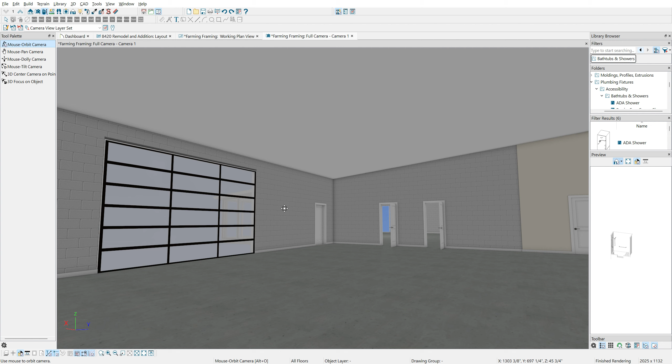If that's the intent, we are definitely missing some structural elements, and we'll get stuck with the city. Per plan, it's calling out what looks like an open space, but that's not the case because there is a block wall, and there's two doors that were leading before into your offices, and then that's your other door. This would require a major build.

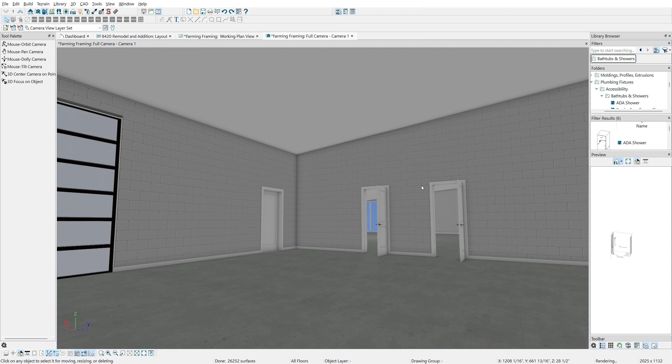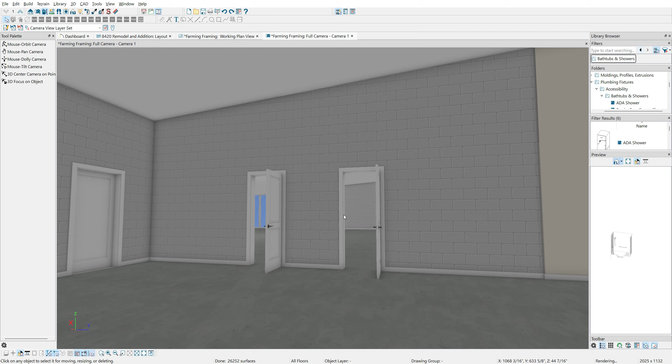It would not be a cheap thing. You would have to basically create a footing that would have to meet the structural design, and an engineer would actually have to stamp it. Then you'd have to put a post, be post and beam, more than likely an I-beam, metal, and then we could knock out this block. But I don't know how realistic that is. The time frame and the engineering process takes some time. We can definitely explore that and see if it's a viable option.

Now your second question is on the staircase. The layout is shown that you'd like the staircase changed with the orientation. It's currently going this way.

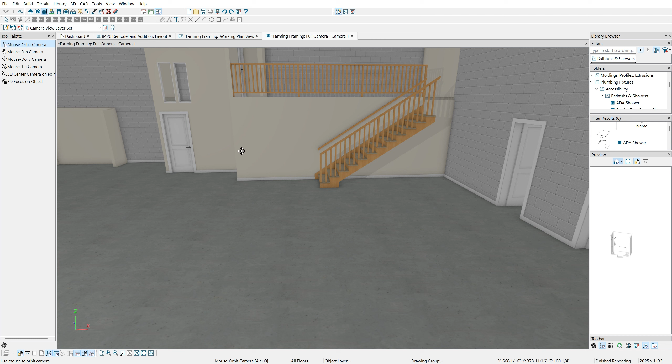Now your joists would have to be brought out. Your floor would need to be taken out, and then your joists would come out, and then you'd basically create your post and beam. Typically, on a remodel, you'd actually have a design, and then would build it accordingly. We can do that and try to run an inspection, and if we don't have the drawings for that, we can just build them and call an inspection.

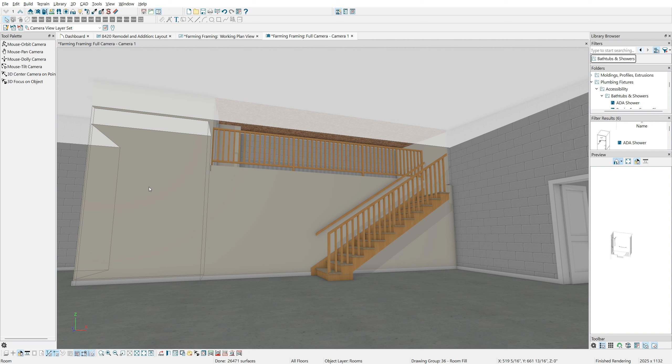Third, your wall as of right now, it's going up like that. Trying to remove this wall and reframe it would be something really major. In addition, you have your I-beams as supporting structure—you're not able to move those out. As discussed, there's an I-beam that's being removed, but trying to remove this whole structure with the welds on it, I would not recommend that. That's something that needs to be discussed.

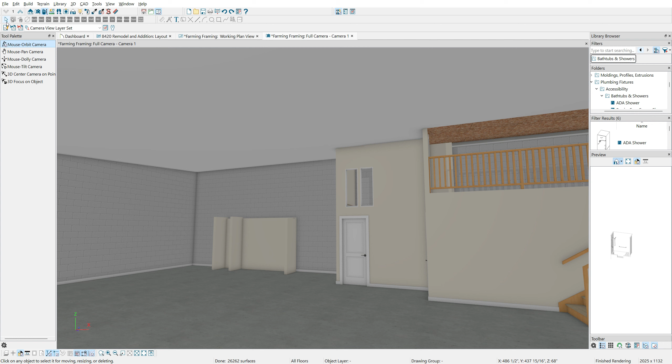Your fourth question is basically on this wash area. What are we doing here? How is that going to connect to your plumbing, your sewer line, your water, all that good stuff? Is this structure being built with 2x4s, or is this going to be more of a cabinet style, and then everything gets hooked up? Regardless what gets done here, what are we doing with this block wall—is this getting framed in, so all the conduits, sewer line, and all that can run behind it? It's doubtful you'd want that visible.

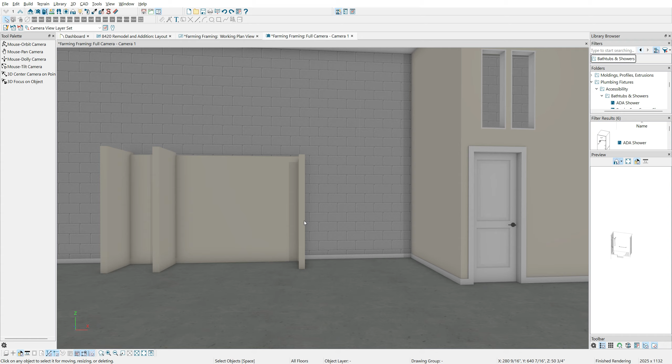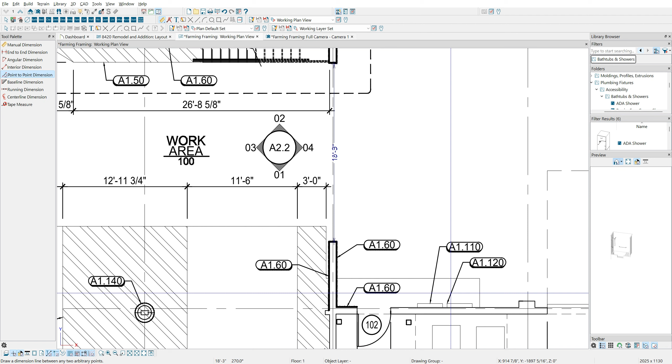I mean, you could potentially do a glulam. It'd probably be a 6x14, and you'd need some pretty serious stuff in there. And how do you connect that to the block? I don't know. It's doable, but it'd be something pretty major.

Now your staircase, changing the orientation—remember, you have your joists. You'd literally have to change the direction of the joists, make sure they come up to here. Then you've got your joists sticking out. Then you're doing basically a header rim board, and then you've got your beam in here, and then you've got your posts that are supporting that.

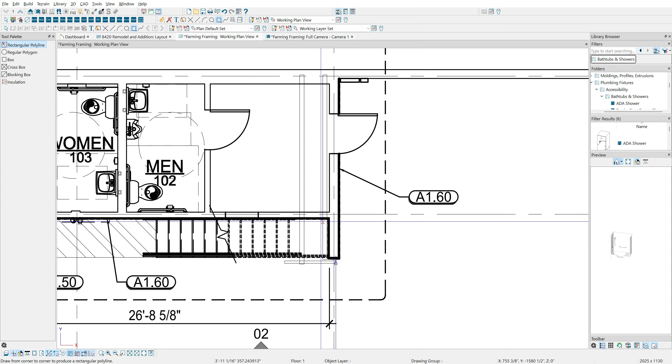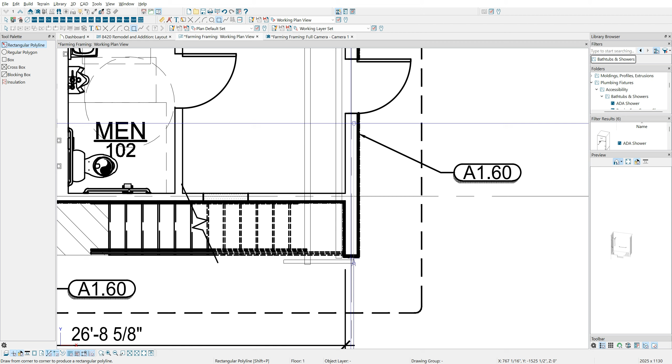We'd have to apply, maybe doing a header, but it's doubtful they would allow that since it wouldn't really support it. Possibly attaching it to the block, but we'd have to make sure if it's actually poured or if it's hollow—if it's hollow, they won't approve it. There's a chance that this is hollow, but poured basically where your rebar is at. So that's something pretty significant.

Now, some of this layout is being changed inside, so this would need to be reframed, and a lot of the plumbing would have to be redone. The question is, how much can we actually touch it? If we start moving a lot of stuff, the structure is all connected. What's the viability? If we start working on that, we kind of can't go back. So we have to discuss that—or do we keep it as is?

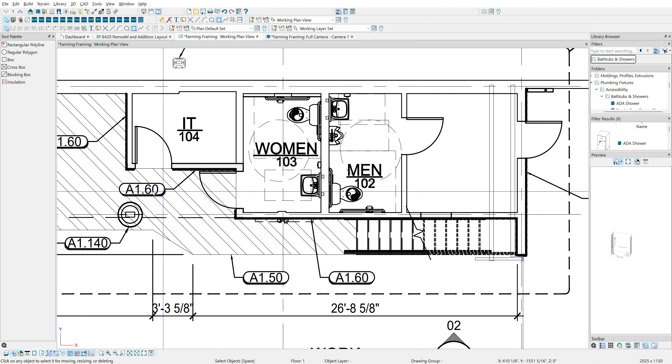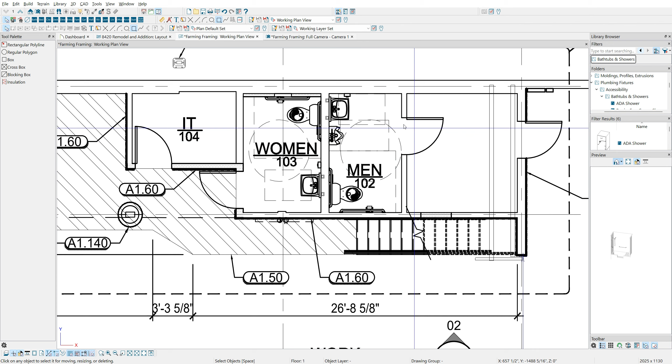As of right now, this looks different, right? So you have your women's bathroom, you turn to the left, go forward, and go into the men's bathroom. Maybe leaving that as is, and then changing this, and you could block this off—there's a door leading there. Block that off, extend the women's bathroom, and punch a new hole in here. So that could possibly work, but it won't look exactly the same. The IT will be bigger, as discussed, because of the I-beam.

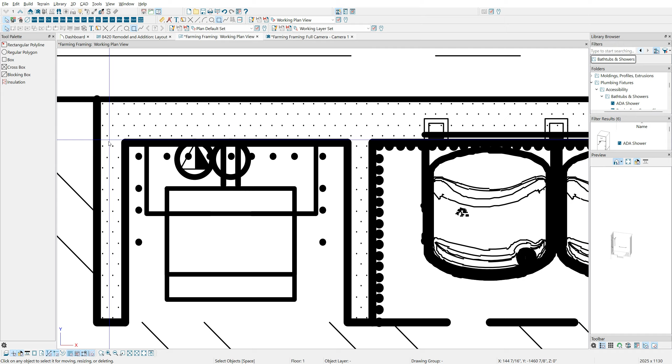And lastly, your wall, the framing—just need some clarification on the decision here. What is this, framed, or is this a built-in cabinet? Not sure what that is. Not really seeing a ledger describing it.

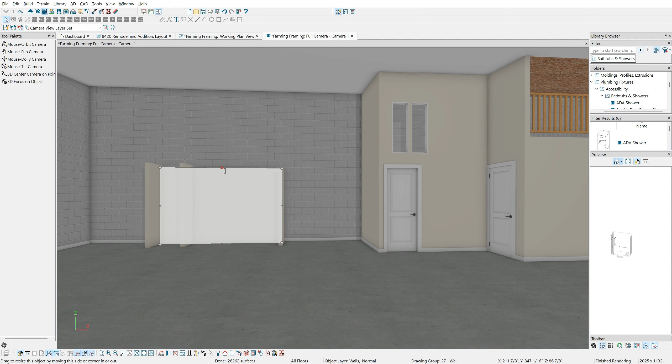Oh, it's asking for a metal stud. Okay, if it's asking for a metal stud, what are we doing? Is the metal stud going all the way to the wall, or are we just stopping at like 8 feet? And then do we need to do metal stud at that point, or maybe just do it out of wood? Yeah, so let me know.